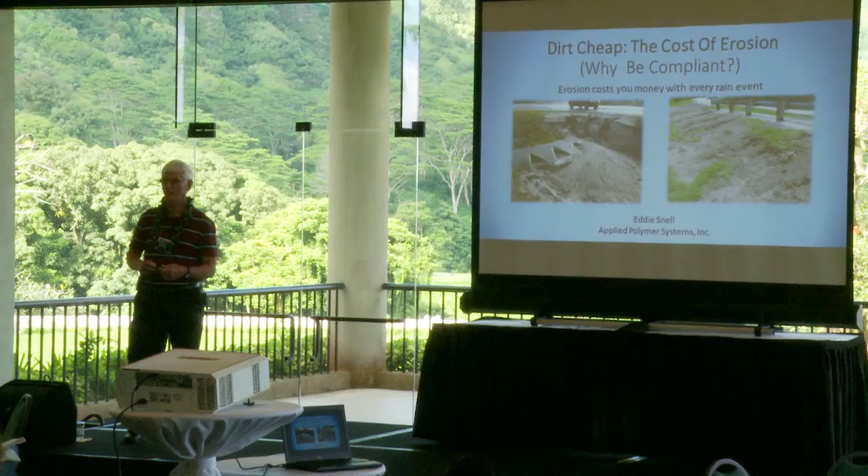Thank you. I don't think I could have imagined a more spectacular place to have a conference than this. This is truly amazing.

What I'd like to talk to you today about is the concept that erosion costs us in many ways.

Every now and then, and I'm an old guy now, I bump into somebody who goes, it's just dirt, who cares, get out of my way, I have a road to build, whatever it is. But really, there is a cost.

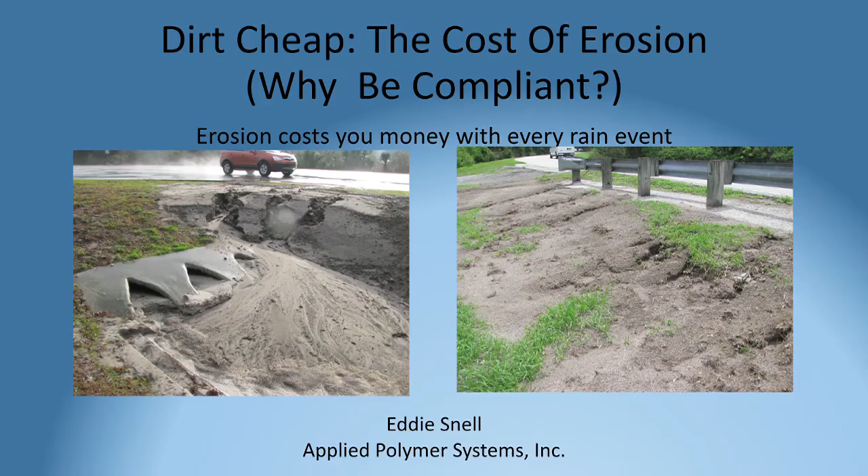I've attempted in a few places, which I'll show you on the slides, to put some numbers on it, but the numbers are fictitious because every place where you build roads has its own chart and numbers that they put to it. I can look them up and give you rates, but there's so much variability in them that the exact number, don't hold me to it.

Just look on it as a low cost, a medium cost, or a high cost, and you'll kind of know that with your experience.

I do have some actual numbers later on that I got from one of the largest home builders in the United States on what it costs when things go wrong there. So I'll go along with that.

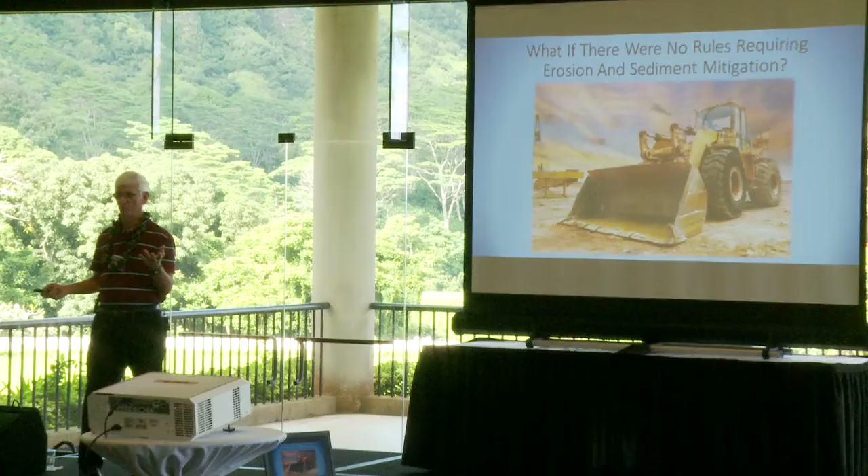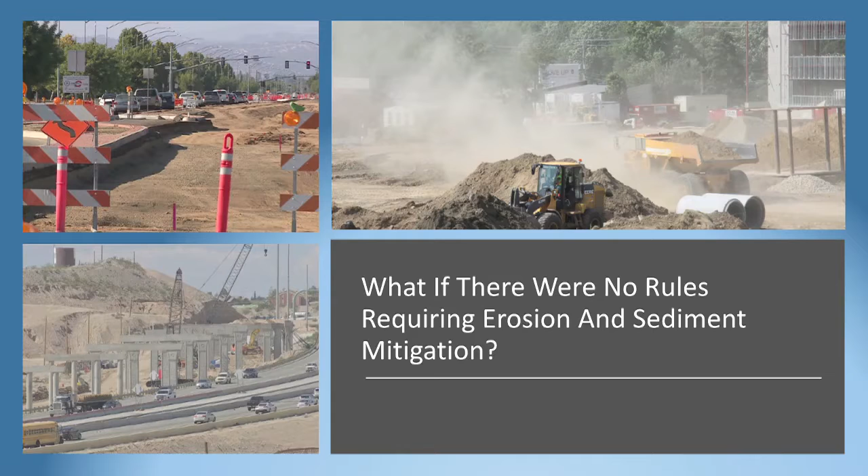So let's move on. What if there were no rules requiring you to mitigate erosion and sediment control? What if you could just build, not have to worry about a stormwater pollution prevention plan, NPDES, an agency coming out to do anything, a SWPPP inspector telling you you've got to fix this? Kind of like, you know, back in the day. I mean, they just did stuff.

When you're looking at the cost of anything, there's a cost that you deal with on a daily basis, such as what you pay for an hourly rate for a piece of equipment, an operator, or materials.

And then there are other costs that the people who actually account for it see, such as the costs of employee benefits, health insurance, retirement, things like that, and the depreciation costs on a piece of equipment.

There are costs for if the equipment is sitting there idling, if it's in standby, if it's being used. And on most construction sites, the average piece of equipment sits there 41% of the time not doing anything because it's waiting for some other process to get done.

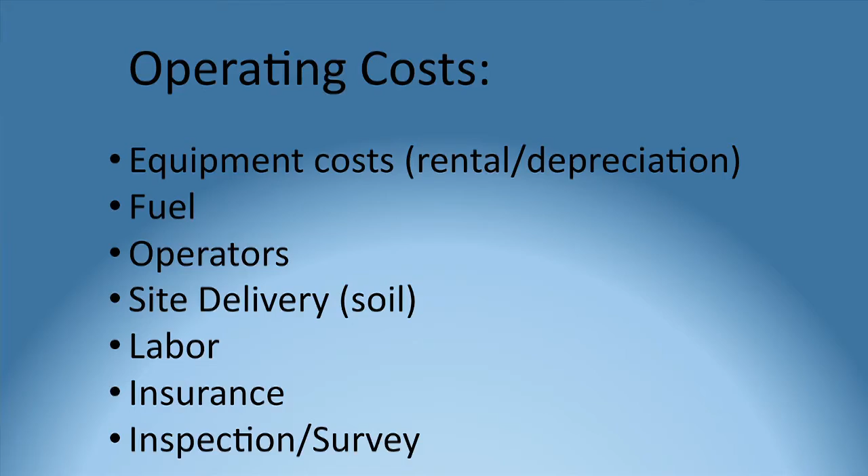You can't have the bulldozer pushing everything back and forth until a compaction is done, and then it has to be tested to see if it met that compaction before they push more soil. So this whole process is an elaborate domino train where everybody's doing something and waiting, hurry up and waiting.

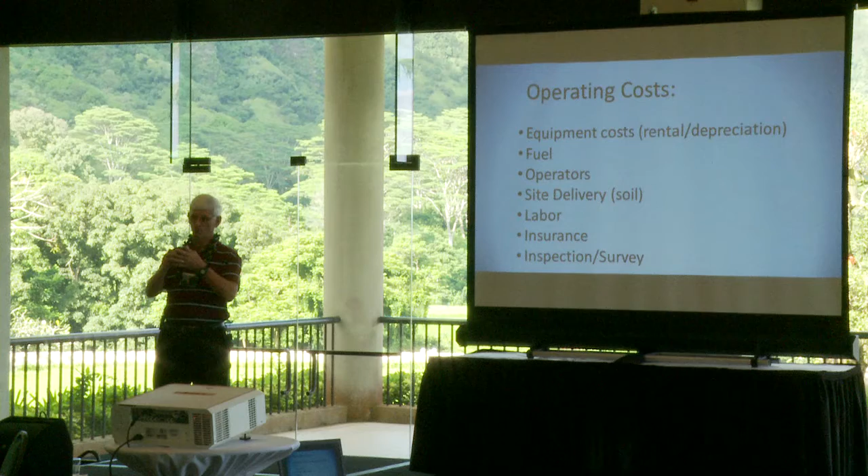As a result, there's all kinds of charts and information out there that you can find. I looked at different things. One of the better ones I saw was an old document put out by the U.S. Department of Agriculture, because the Forest Service specifically doesn't build roads, but they have to account for and budget for roads every now and then going to a national forest or a logging operation. So they look at everybody else's information and try to sum it up.

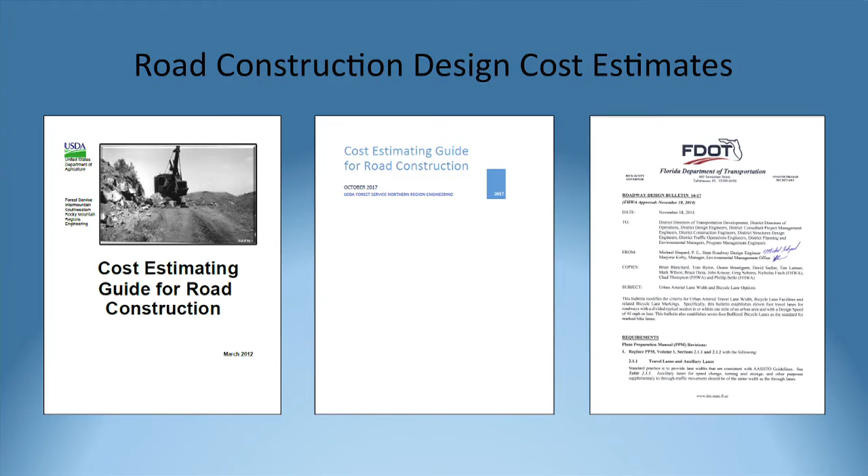So I looked at a 2012 one and a revised one from 2017. I'm from Florida, so I looked at our DOT. And then there's the National Highway Transportation System and all these other documents you can look at. They typically produce some type of document.

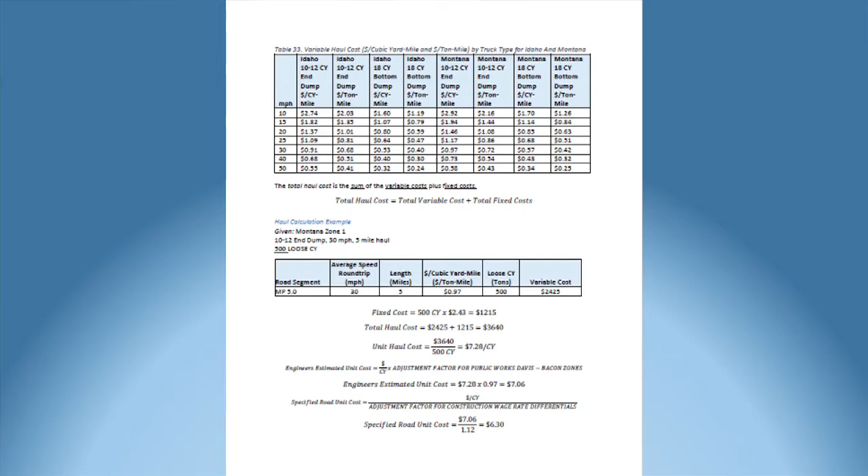If you have a lot of windy hills like you do here, it takes longer to move a piece of equipment from one place to another or have fill delivered to your site. And there's more charts talking about on and on. Anyway, I went through all these different numbers. You can come up with costs for different pieces of equipment, different horsepower, different sizes. They have them in different states.

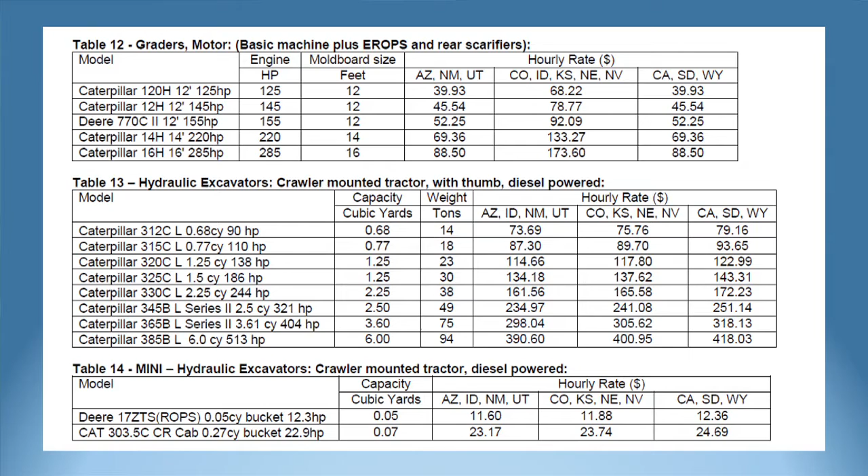After a while, it became obvious there was no way I was going to be able to come up here and say, this is what it costs you to build a mile of road, because you all know more about that than me, and that was not my purpose. The purpose was to show that if you're not careful, you're going to waste money—with more zeros on it than I thought was there, way more.

So we get the different pieces of equipment and how much capacity they have, and I came up with a hypothetical site, talking to some of my contractor friends, about a 5-acre site. It may be shorter in linear distance, maybe 1,000 feet, maybe less if it's very steep, but let's say we're working on a 4-lane highway with slopes up gradient and down gradient, and we have to get this thing going. I selected at random how many pieces of equipment there would be: 2 dozers, 2 compactors, a grader, 2 dump trucks, people to operate it, some laborers because they're always needed, and we're going to have delivered at least 5 dump truck loads of fill.

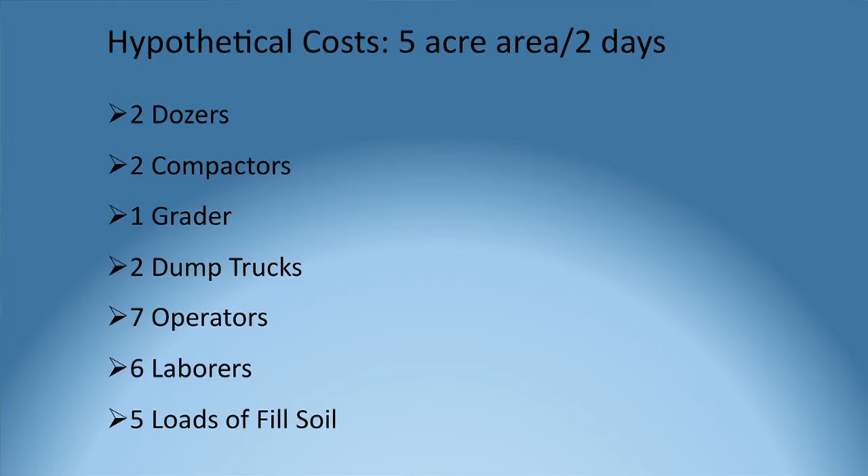So it's hypothetical. Don't hold me to it, you can tell me I'm wrong later. But I had to come up with some way of comparing this.

In doing that with the costs, I selected an average chart in the western US, and it came up with a cost for every piece of equipment, which I averaged into a low number, a medium number, and a high number. So it's a range of values. Looking at that range, it came up with an hourly cost for all of that equipment, including paying everybody, of about $1,400 to $3,200 per hour, accounting for depreciation. Oh, and I also forgot there's also profit - 16% profit built into that because construction companies build roads to make money. So that's all in there.

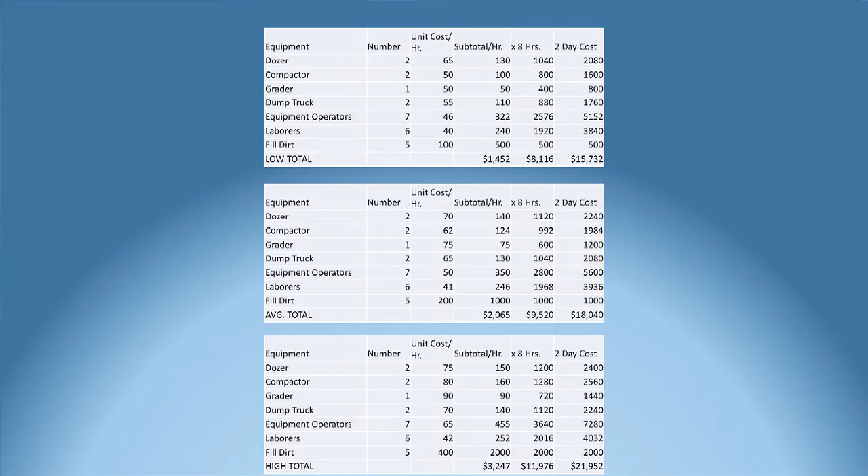And then we kept rolling more and more with different costs, and ultimately what I wanted to do is boil this down to a number, a chart. If we work on that site for 2 days, maybe in some places they can do it in a day and a half, in other places it may take 3 days. I don't know, because every site is different.

This is what you're looking at for all those costs, including making a profit, employee benefits, etc. You're looking at anywhere between almost $16,000 to almost $22,000 in cost to have to go back and regrade that site. Now, that number probably has a 25% margin of error in it, but again, you can see there's zeros on the end of that. There's a cost for having to redo something. We all know that, and construction and highway building is very expensive. I mean, keeping numbers out just for paving, like $1 million a mile just for the asphalt. So it's a very expensive business that you all are engaged in.

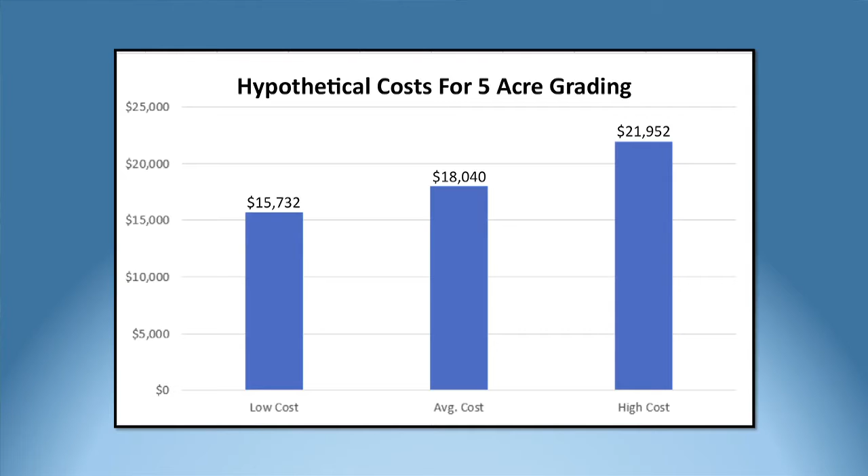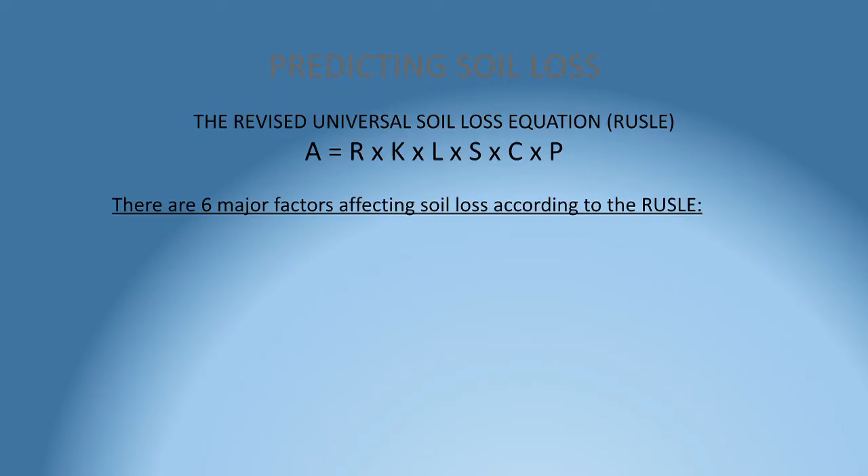As a result of that, in attempts to calculate how much soil you could lose, we've got different ways. This is the old one, the RUSLE, however you're going to call it, a standard way of calculating soil loss. It goes into what the average soil loss is in tons per acre per year, which includes how much rainfall you get for your area, and what type of soil you're working in. Some soils are much more erodible than others. Sand is typically more erodible than a compacted clay soil.

What's your slope? I'm from flat Florida, I can't believe some of the mountains you have out here. I've been in Colorado as well - those are going to be much more difficult to work in than a flat area. What is going to be your vegetative cover? Are you going to leave some existing vegetation, or are you going to grow vegetation? The presentation we just heard at the beginning talked about the importance of getting vegetation established. Vegetation is ultimately what keeps all of our roadways in place, unless we're going to pour concrete every single foot of it. And there's usually combinations of this going through.

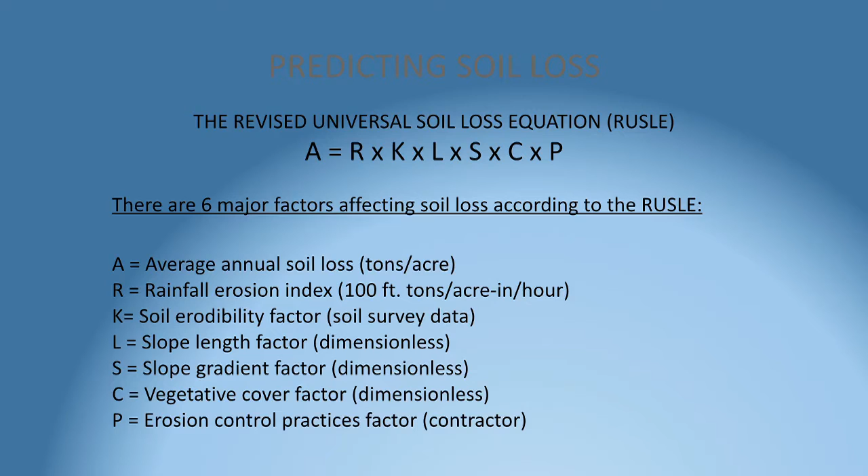And ultimately, what are our factors? What practices are we going to use? Are we going to use a rolled erosion control product? Are we using silt fence, hay, straw, mulch, compost, whatever those are? Those are all variables as well.

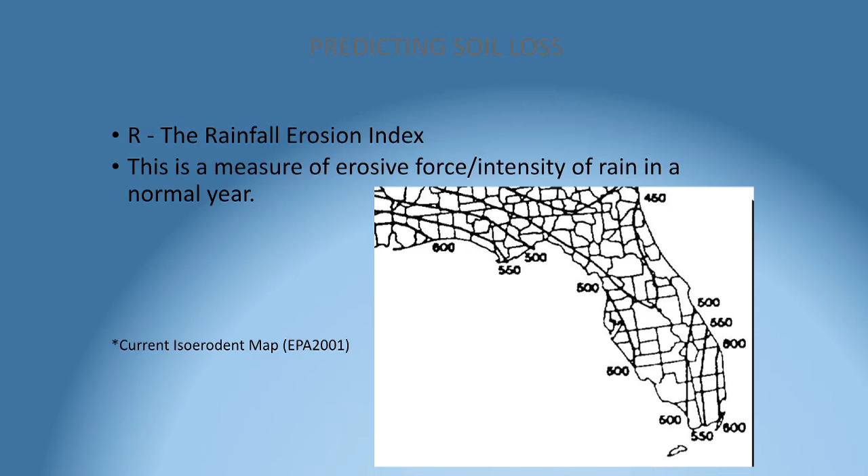So we can calculate the average amount of soil loss on a site. We look at the regional rainfall for an area - again, I'm from Florida, we have a very high erosive index, we get a lot of intense rain events, so our number is up between 500 and 600 for an erosive index. But if you compare that to another area, say Seattle, Pacific Northwest, they get twice as much rainfall as Florida, but it's more of a misty drizzle kind of effect as opposed to an intense tropical thunderstorm.

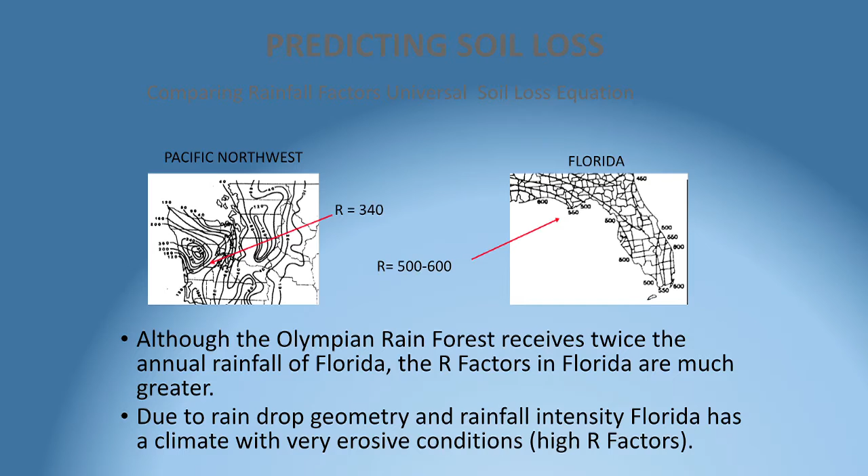Hawaii is kind of in the middle - parts of it in the mountainous areas see more rainfall events, those are closer to what Florida sees. Parts of it on the leeward side are almost like a desert, so they get much less. So you have a lot of variability in the places you work, even out here, and you can see how that factors into it.

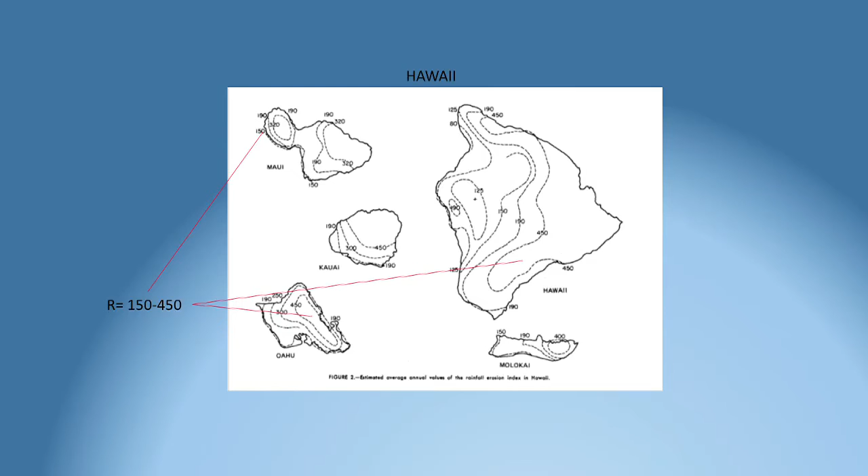The soil erodibility factor has been determined by scientific studies through the Department of Agriculture as a number from 0 to 1. The higher the number, the more erodible the soil. So if you had a 0.9 erodibility index, that soil will go away the first rain event you get, and you better make sure that stays covered, or you get in and out there really quick.

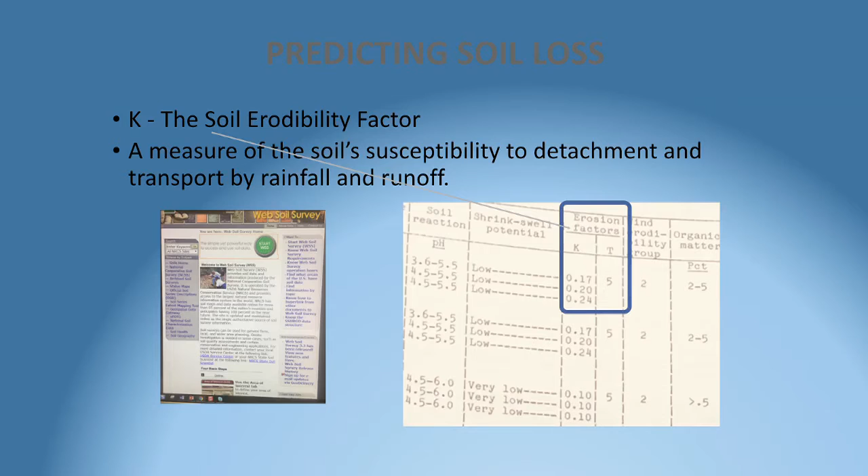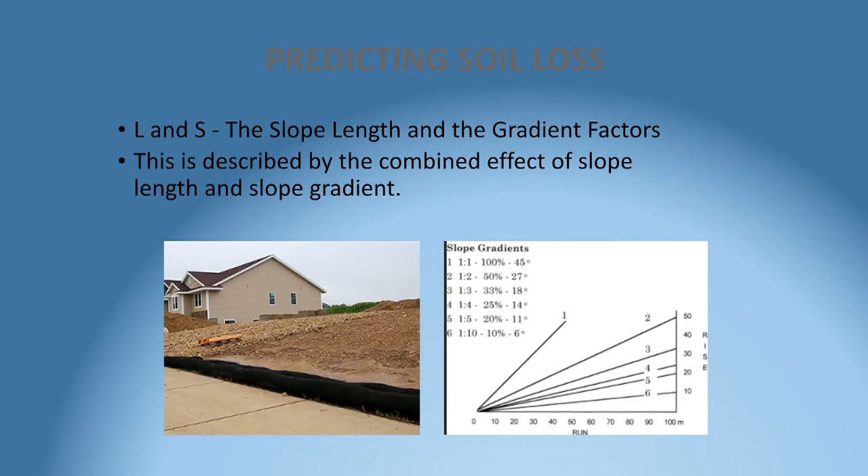You can look up these numbers for reference. The slope, length, and grade are determined both by the topography of the area you're working in and what you're designing. Sometimes we decide not to go over the mountain, we drill a tunnel through the side of the mountain, or we build a bridge.

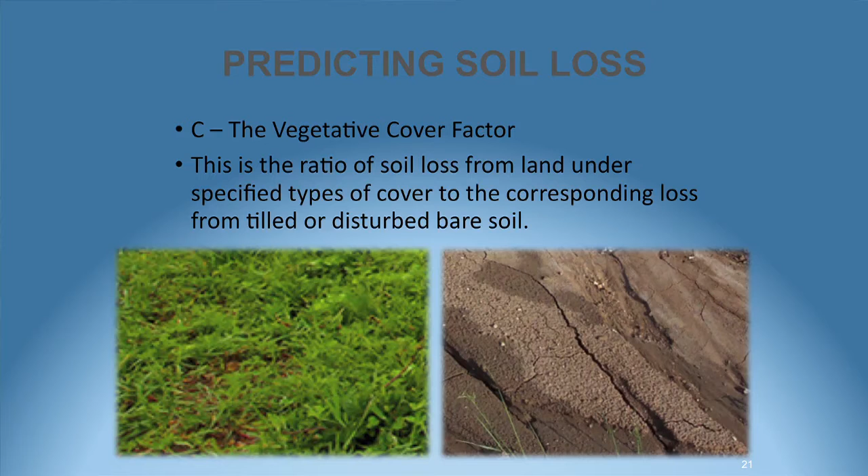In other places we go under things. Vegetation is the final cover, and we want that on there. If we're inheriting a site that had no vegetation, either through redevelopment in an urban area, or it was typically a desert area, it may have difficulty establishing vegetation, and we may have to choose some other cover.

Again, our practices determine how much challenge we're going to have. We may completely line a drainage swale with riprap rock or some type of flow interrupter, as we heard earlier, or we may look at sediment controls, which slowly allow unprotected soil to move from one compartment to another.

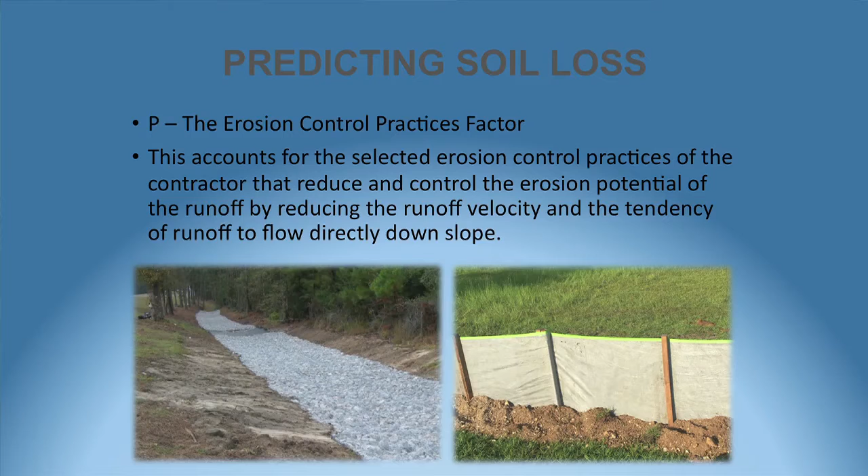Rainfall is the only thing you don't have control over. I say this every conference and haven't had any takers yet—if you can control the rain, please see me on the break. I have an offer.

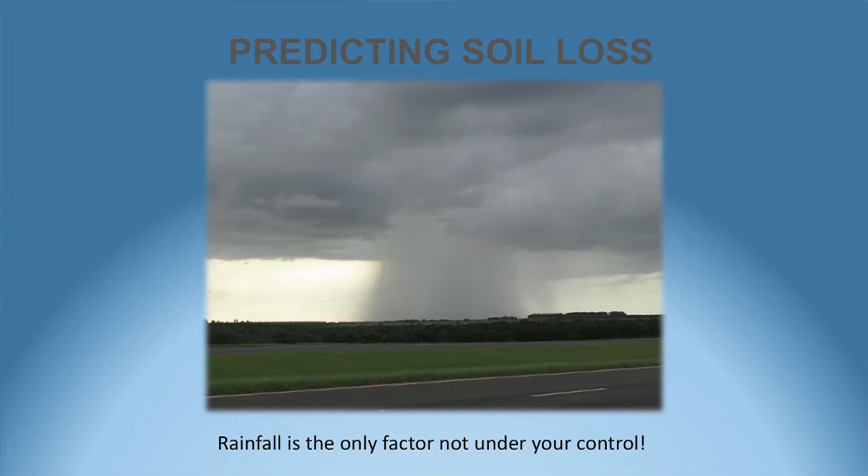So how do we manage this? First, we try to stop that raindrop from hitting the soil, as was emphasized in the previous speaker's presentation. But once that raindrop hits the soil, it explodes and loosens any attachment, and the erosion process starts. We want to minimize compaction where appropriate, because compacted soil behaves like cement and gives the water more energy and velocity.

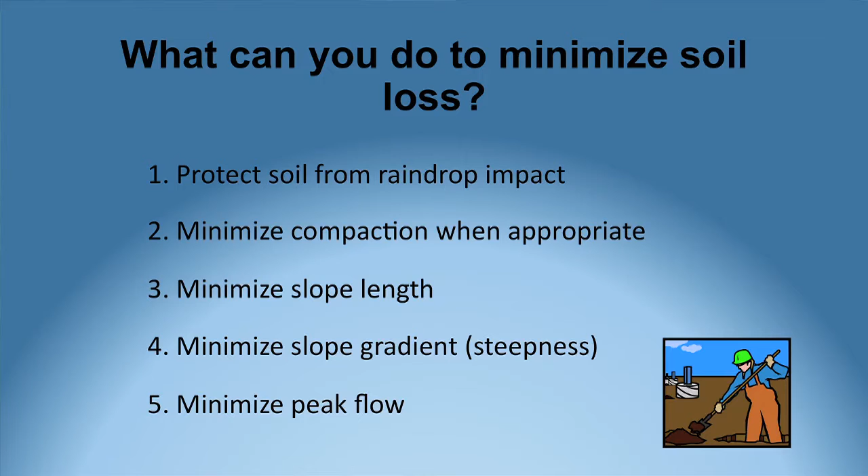Unless that's our final practice, like a concrete ditch or part of the roadway, we don't want to do that to the soils. Minimizing slope length means we still have to build the highway going up, but maybe we add flow interrupters or check dams so the water doesn't run out of control. For peak flow, we try to get as much water as possible to infiltrate into the ground—that's green practices like infiltration basins.

Here's some math from the University of Central Florida's engineering department, calculating soil loss for different sites. This is a typical 5-acre site, 600-foot slope, pretty flat, 5% slope. The soil is medium erodible, 0.28, remember the scale is 0 to 1. How much sediment can be lost from this site after a 2-inch, 50-millimeter rain event? Will it be 24 cubic yards, 66 cubic yards, or 98 cubic yards?

How many people think it's 24? It's okay, I know you're not awake. Nobody thinks it's 24? 66? Do I hear any bids for 98? Going once... oh, got a bid for 98. All right, the actual number is 66 cubic yards can be lost from this site after a 2-inch rain event.

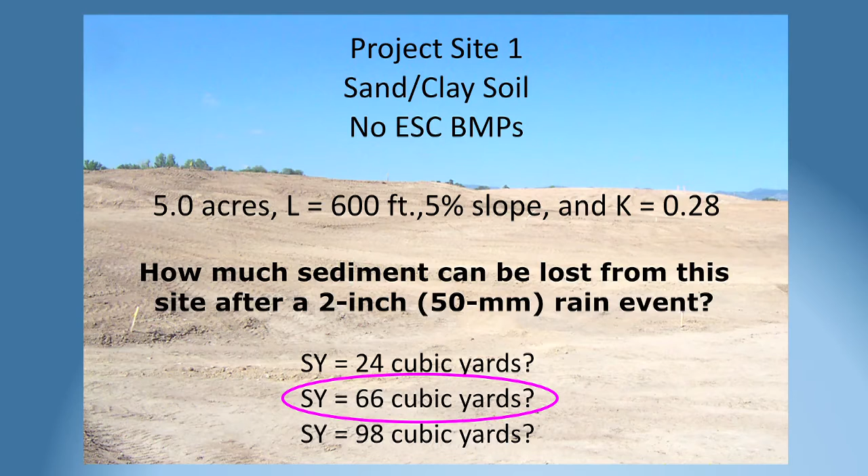What's 66 cubic yards? That's 5 dump truck loads of soil washed off the site, either through a series of rain events or one single event. Remember, this site has no erosion controls—we're working like we used to. So boom, 5 dump truck loads of soil just went off the site.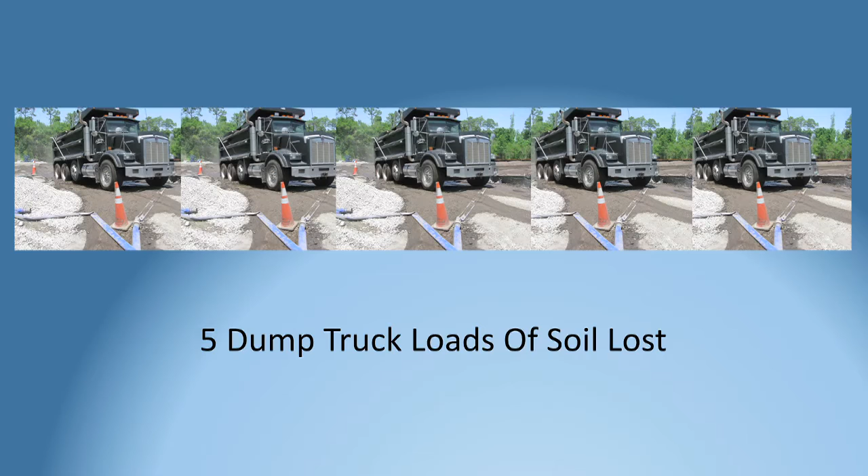We're going to have to go back and get them. We'll have to grade out the rill and gully erosion, and may have to clean out our drainage swale. Maybe we get back 2 dump truck loads, but we still have to bring in the other material and rework it. So that's going to cost us some money.

What if we take the same site and add seed and mulch, providing some cover to reduce that raindrop impact? Again, after a 2-inch rain event, what do you think our loss will be now—0, 2, or 4? Anybody for 0? Good, there's no 0. 2? A couple? 4? The answer is 4. But remember, we went from 66 to 4—that's a 94% improvement just from seed and mulch, one of the least expensive erosion control techniques you can do.

Here's a different site. This one has a shorter slope, 100 feet, but look how much steeper it is—30% slope, much steeper than our 5%. Same soil, same erodibility. After a 2-inch rain event, how many acres of this site do you think will lose that same 5 dump truck loads of soil? 1, 2.5, or 4? Anybody for 1?

On this much steeper site, you only need 1 acre to lose the same 5 dump truck loads of soil. So steeper sites are obviously much more challenging and require much more attention and better erosion controls than flat sites. If you're not doing anything different on a flat site versus a steep site, you're not managing it, you're just kind of letting it go.

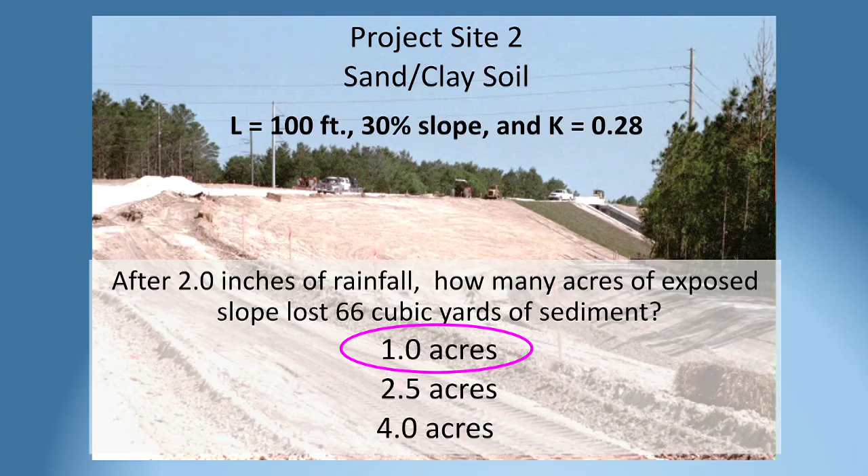All right, what if we take this site and we put down seed and straw? Now, after 2 inches of rain, how much soil are we going to lose? 0, 5 cubic yards, or 11 cubic yards? What do you think? Nobody thinks 0 - you're smart enough to know it's not 0. So actually, it drops to 11. That's an improvement, but that's still almost a dump truck load of soil on a steep slope.

Steep slopes are very challenging. They require much more attention.

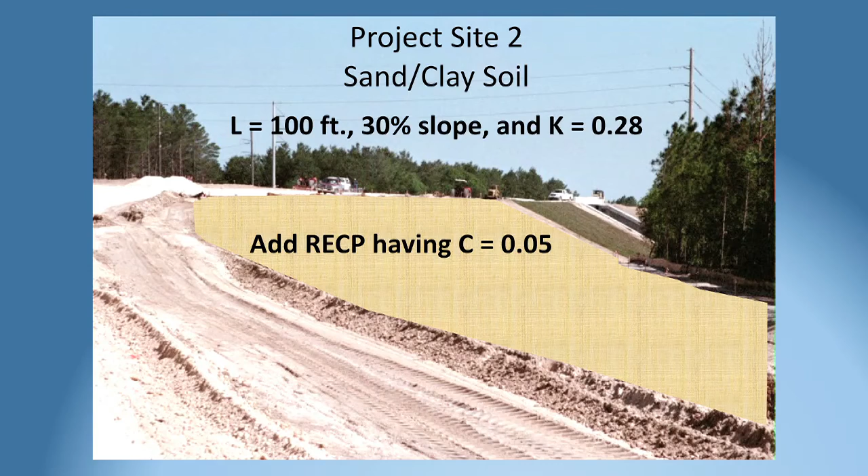Well, what if instead of doing seed and mulch, we add an erosion control blanket that has a C factor of 0.05, a very low number? It actually is protecting it pretty well. And let's assume they put it in right, and John McCullough has some techniques - they're doing all the right stuff.

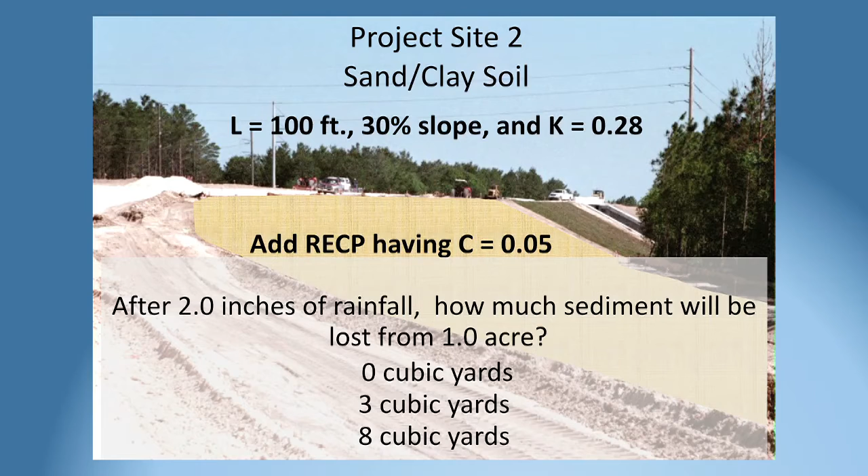So now, how much soil do you think is going to come off of this after 2 inches of rain? 0, 3, or 8? We'll save you time - it's 3. So it is possible to manage a steep site. 3 cubic yards is something you could manage and work through. You have to still deal with it and have people making repairs and everything, but it's a lot better than losing 5 dump truck loads of soil.

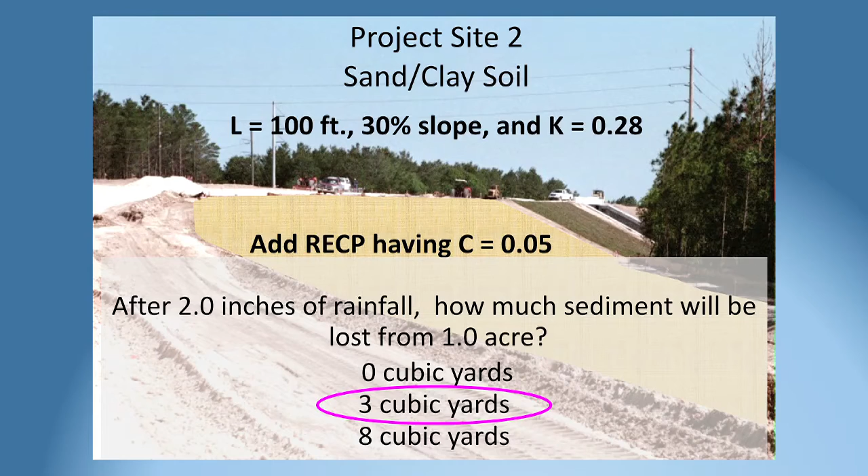So again, learning and understanding how some of the properties of the different controls that you have choices on work gives you better results, which saves you time, saves you money.

So in summary, be concerned about sediment yields. It is important, it does have an impact on your site. Don't leave bare ground conditions for extended times - bare soil is your enemy. As soon as you get it sloped and get it graded, cover it with something, because if you're gambling on the weather, you're probably going to lose, and you'll have to redo it, and it'll cost you what you think you saved in time and money. Large amounts of sediment can leave a site, especially a very steep site.

Stabilize them ASAP to save that money. You have to spend money to save money, especially in this business. If you go cheap, if you buy cheap BMPs and just use them all the time, if you go back and look at your inspection reports and how much time and effort are being spent putting the silt fence back up, reinstalling a wattle, cleaning out this thing over and over and over, you're actually losing money if you're not spending for good quality product and if they're not installed correctly.

So, I got these numbers from the Environmental Programs Manager for D.R. Horton, the largest home builder in the United States. So it doesn't apply to the roads, but again, they're the costs of some of the erosion. It costs between $35,000 and $50,000 to vac truck all the sediment out of an average home-developed stormwater system, one time.

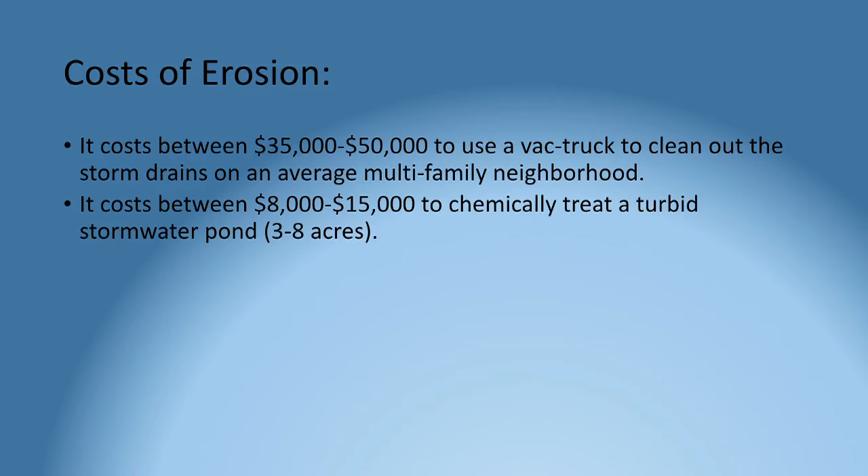In Florida and in the southeast, we have stormwater ponds. The water runs off the site, goes into the pond. They're post-construction pollution treatment, and they have to be maintained and have to be clean. If the water won't settle out because it has clay in it, then we have to do chemical treatment on it, usually using a chemical that's used in the drinking water industry, either aluminum sulfate or anionic polyacrylamide, and that can cost between $8,000 to $15,000 for the ponds.

There's usually multiple ponds and multiple sets of drainage systems on a big site. Worst case scenario, you lose the whole site. We get a tropical storm, we get a series of 4, 5, and 6 inch rain events back to back, and it blows out all their controls. You're looking at spending up to $100,000 to put the system back into compliance and clean it out one time. So this is going to be very, very expensive.

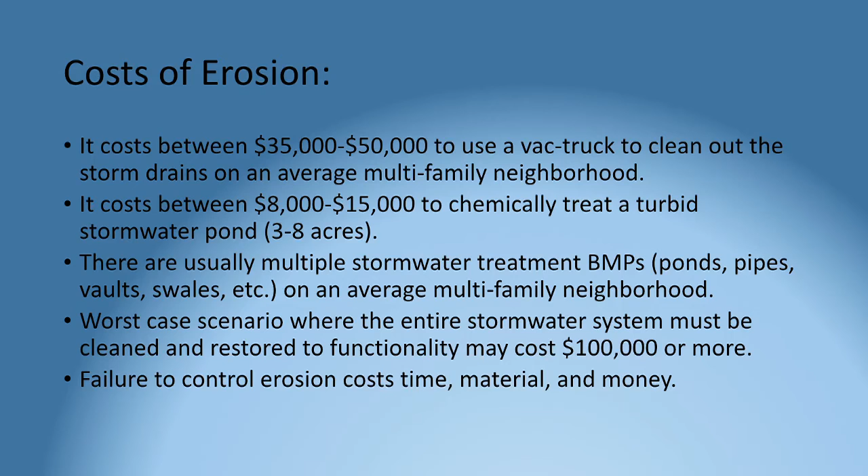This is not talking about you're being enforced on, you've got a fine, how much delay it is on your project. If you have to go clean everything else out, they're not working on anything else either. That equipment is sitting there idle, and the people are being paid to sit with idle equipment. Failure to control erosion, again, costs you time, material, and money. Vac trucks - the more emphasis you put on protecting inlets, the less you'll have to rent the vac truck.

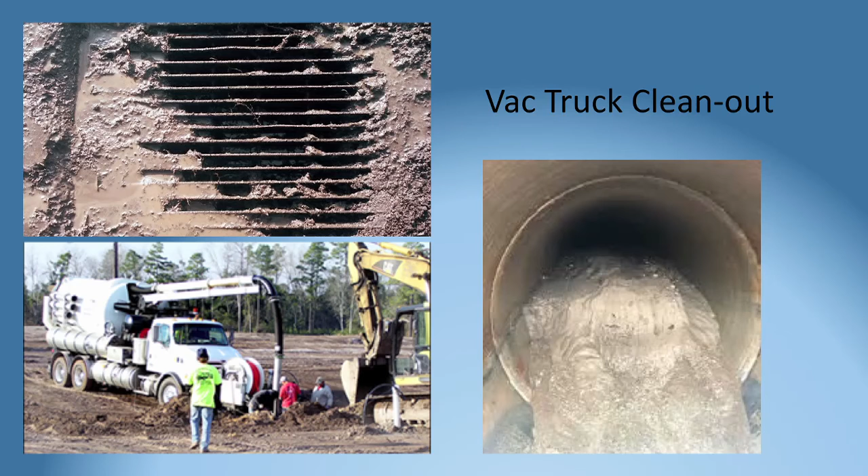In Florida, at times, if we wash a lot of sand into our pipes and it gets into a low spot, it will compact and compact to the point where the vac truck cannot get it out. It almost becomes like a cementitious material. They have to go in there with cutter heads that they use to take roots out, and it's a very slow process. They cut a piece and jet it out, cut a piece and jet it out. So it can be very expensive, even with different types of soil that they have to clean up.

If you don't maintain your inlets, you're looking at maybe losing material. In this case, this goes into a stormwater pond. In Florida, where we have sandy soils, these are infiltrating basins. You may construct some here in some of your porous soils as well. If you fill them up with clay and that material goes into the open pore spaces between the sand grains, guess what you've created? A solid pond with no exit. And in Florida, within 72 hours, you'll start breeding mosquitoes, and you'll have an issue with the Department of Health. So it can have impacts above and beyond what you think it can do.

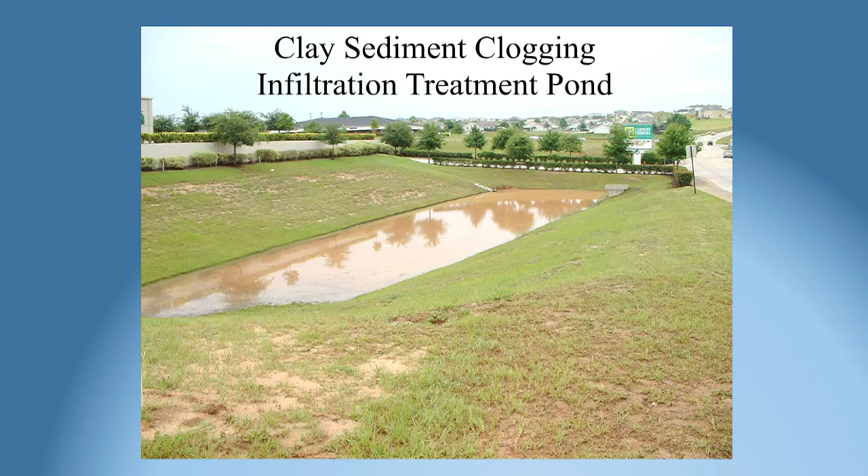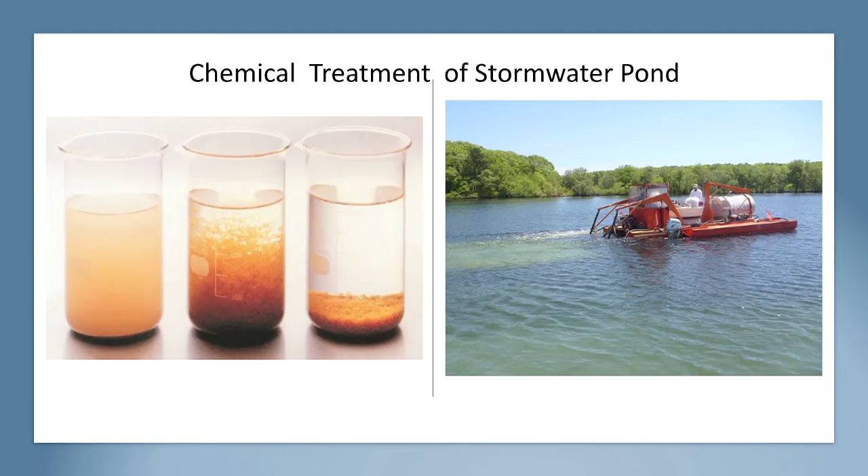If we do chemical treatment on a pond system, first we have to get a sample of the water, then you have to do a jar test so they know the dosage to put for the alum or the polyacrylamide in there. Then you have to pay an operator to go out and apply the material, then you have to do testing and make sure that it's back to the original clarity that the pond was before.

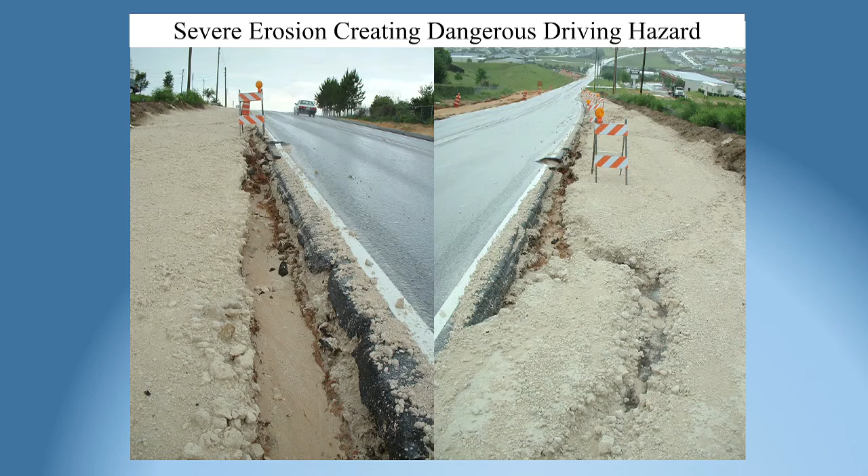Failure to control erosion can have impacts on the edge of the road. Usually where hard meets soft is where we start seeing erosion. We start chipping away at the edge of the roadway here, and we start seeing little pieces calve off. This can incise along the edge of the road, destroy the apron on the side, and again, require us to go back and deal with it. If this continues unabated, it will get worse.

This was only about 1,000 feet from where I live. So some of the worst stuff in Florida occurs close enough where I don't have to go too far to get these great pictures, unfortunately.

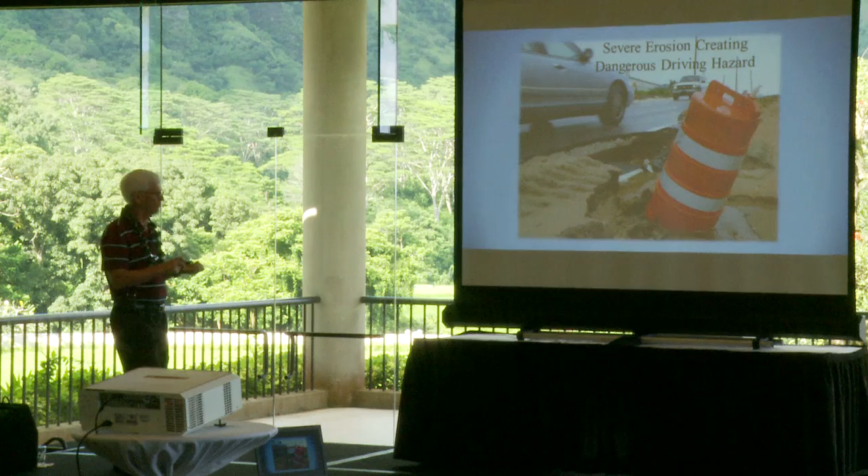If you leave conditions like this and there's an accident, somebody gets in an accident, they hit the pothole, they don't see it, they run off and they get injured. Now you're looking at lawsuits. Lawsuits are not $100, $1,000. They're hundreds of thousands to millions of dollars. They may be open-ended.

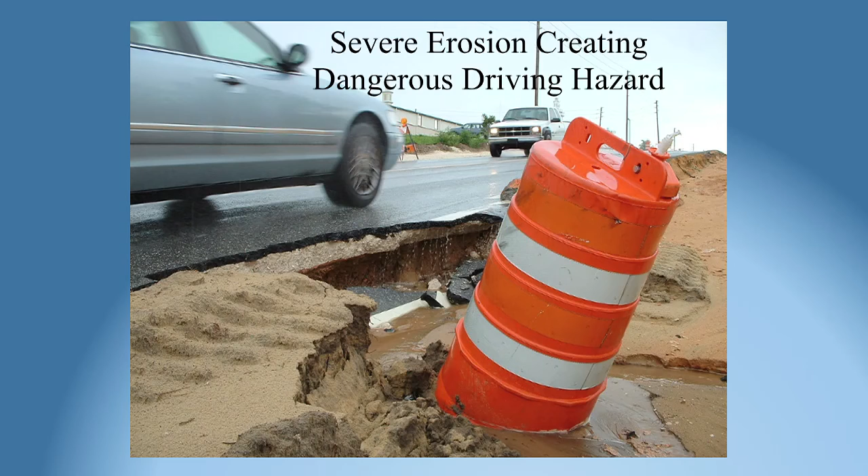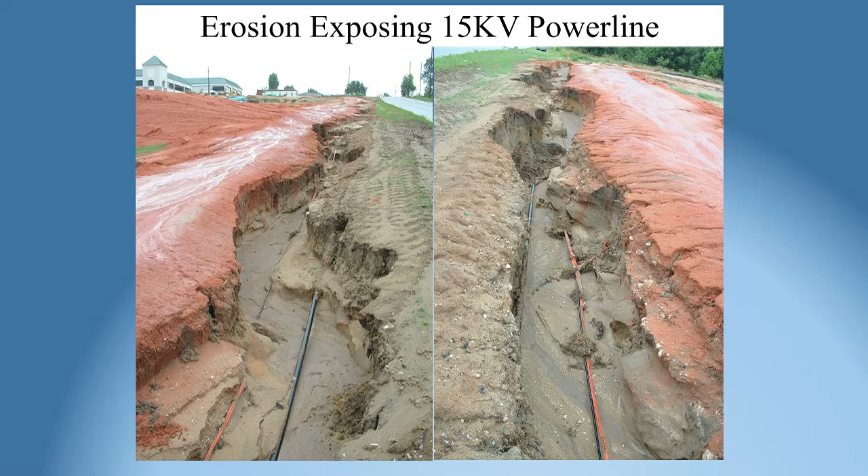So again, there can be other issues associated with not paying attention to the erosion. Water travels downhill. It starts to cause impacts to other systems, clogging and changing the direction of the flow of our drainage systems. Here is a community along a roadway that had erosion that wasn't addressed. It washed open the exposed power lines. These are 15,000 volt power lines that are supposed to put electricity inside of the new homes. Well, it washed them out. They had to stop the road. They had to bring out people to do inspections, make sure there wasn't any damage to the cables. They had to turn off the power to the phase one people living in the development. They were not very happy to not have electricity for 48 hours, all because the road development here didn't pay attention.

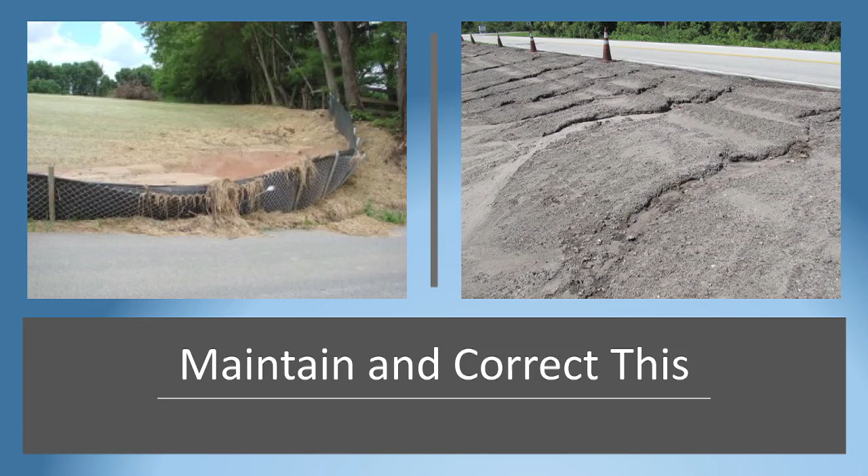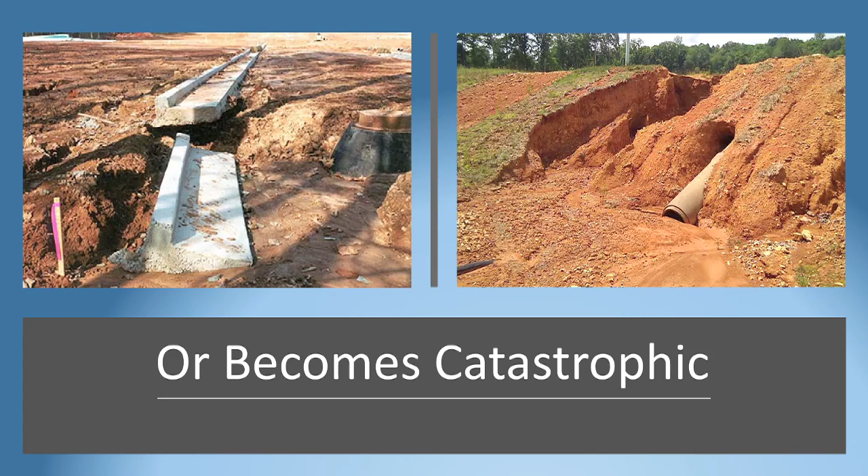Again, we want to catch these problems before the inspectors may show up. These are maintenance problems. We want to move on. You don't want to wash everything into the drainage systems because then you're going to have to hire a piece of equipment to go clean it up. Try not to let everything get to the point where it's catastrophic, where we blow out hardscape, where we cause pipes to fail and come apart. Again, erosion control costs you time, material, and money. Failure to control it. And that's all I've got at this point.

So I hope I've hit that point over and over. Many of you see this, but we become complacent. We're just used to seeing there's always a little bit of soil at the bottom of the hill, there's always a little bit of washout here. Try and manage and ask, where'd that come from? Can I stop it? Is there something else we can do? And you'll start saving money that adds up more and more, and you'll be more effective in your projects so that you guys can do what you want to do, which is build roads.

You don't want to chase dirt. You don't want to chase mud. You don't want to be in the public eye for contaminating the name of, insert name of lake here. You want to do what you want. You want to provide transportation to everybody. So that's all I've got.